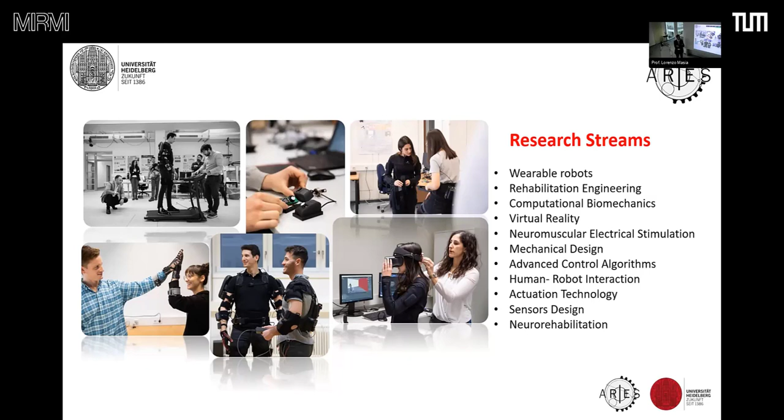I started with rehabilitation robotics. I started in 2005, joining the group of Neville Hogan and Igor Krebs, and this was me.

Then we met again in 2022. They were more or less the same, but I had changed a lot. They were always smiling a bit more rather than in 2005, more relaxed. In 2005, I would say they were super aggressive. I consider them my mentors for my career. They were the people who really helped me and gave me the boost to continue in research.

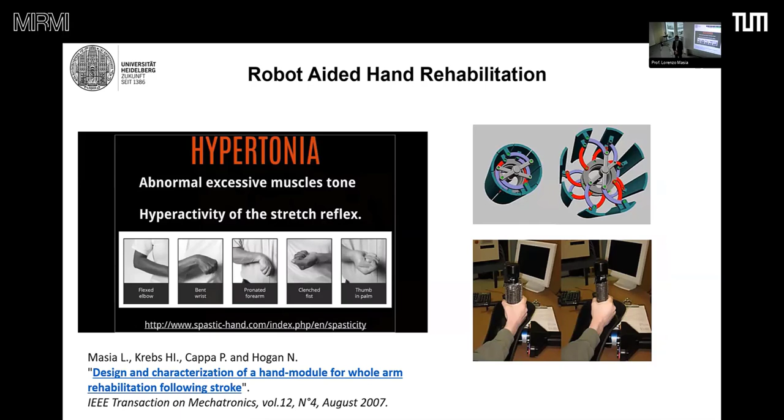Then we came up with an idea of using a very simple mechanism, a crank and sliding mechanism in multiple configurations, to simulate hand grasping. That was the main action we wanted to restore in people affected by stroke. This kind of system then became part of a company that at the time was named Interactive Motion Technology, and is a device quite widely used in the US for hand rehabilitation.

Once I came back to the Italian Institute of Technology, I wanted to design my own systems. This is my behavior - I want to design my own technology, and it's the same philosophy we use in our lab. I designed a system for wrist rehabilitation. It's a system that mobilizes all 3 degrees of freedom of the wrist. It works as a haptic system with a virtual reality environment.

I use it for several purposes, starting from general haptics, visual motor rotation, mastering of a virtual object with intrinsic elasticity that can be simulated by manual manipulation. Then I wanted to test myself on the ground of neurorehabilitation, using this kind of thing also in people affected by stroke, mostly adults, but also I have some experience in cerebral palsy, which is actually a stroke that happens in the very early stage of the developmental process in children.

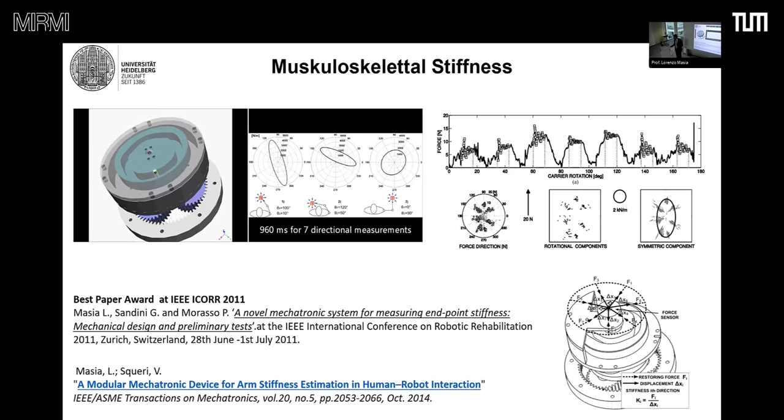What we do also in Heidelberg is studying bimanual manipulation using a bimanual exoskeleton. We have our own proprietary software for simulation of bimanual coupled interaction, and we use, of course, a commercially available exoskeleton, including also electrical stimulation.

I'm not going to talk about all these things. What I want to talk about is wearable technologies and exoskeletons. The first example of an exoskeleton dates back to 1967, when Ralph Mosher, an engineer at General Electric, wanted to design his own exoskeleton for industrial purposes.

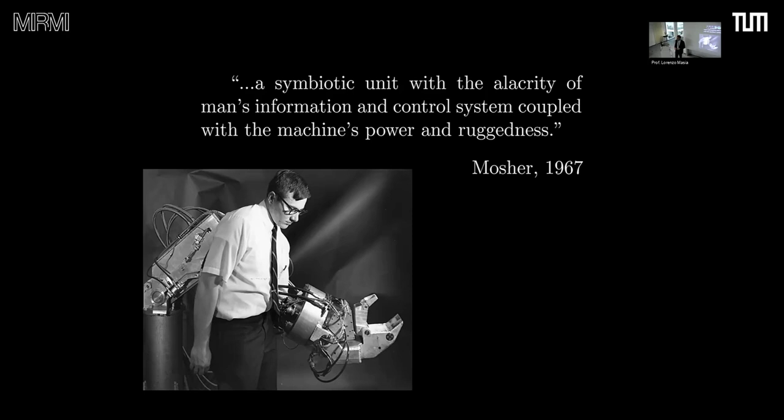That was quite a powerful system, but in terms of control, it was not at all symbiotic, even if it has been defined as a symbiotic unity. The problem is that at the time, control system design was mainly extracted from automation and didn't rely on human-machine interaction. That was a theorization and formalization of regular, classic control into interaction with men and robots.

Over the years, this approach shifted from a very rigid exoskeleton, highly powerful but with very low bandwidth of motion, to exoskeletons that are intrinsically softer, with higher bandwidth, but lower force. It's not that one represents the evolution of the other, because rigid exoskeletons are still widely used, especially for people affected by spinal cord injury, since they can sustain the weight of the person. However, if you want a very powerful system with low bandwidth of motion, you go for a rigid exoskeleton. If you want a system without a huge power-weight ratio but with very high bandwidth, you go for exosuits.

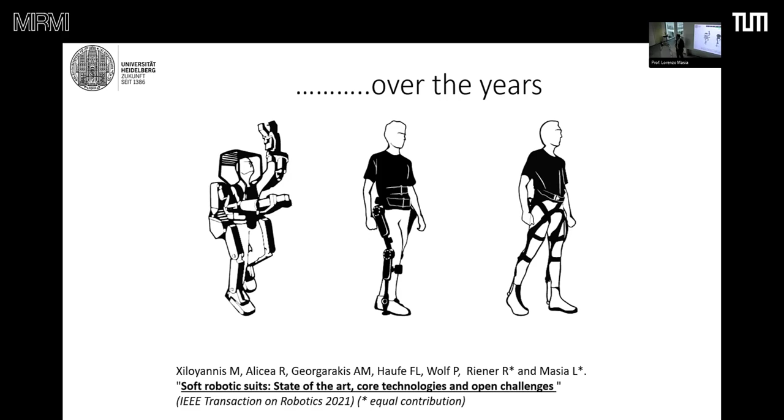Now, what is an exosuit? An exosuit is a wearable system that does not involve transmission of motion via rigid links and rigid hinges, but is composed of textile, and this textile includes both the actuation and the sensing. You rely on your biomechanics to transmit motion using physiological joints while actuating a different kind of system. In this example, you see a tendon-driven system used to mobilize the elbow.

There are several exosuits. The first examples were in the lower limb, with different kinds of actuation: tendon-driven, pneumatic, hydraulic actuation. Who were the pioneers? The Biodesign Lab of Conor Walsh at Harvard. They were the ones starting first.

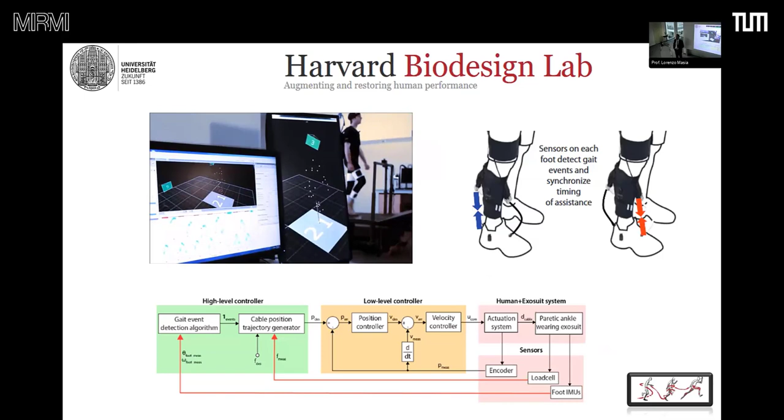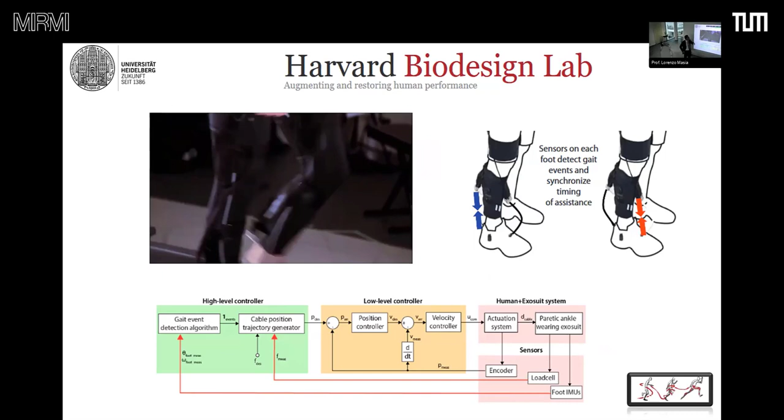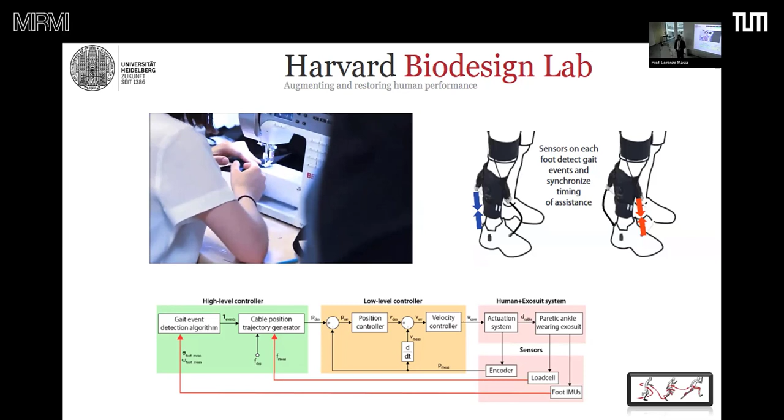How does an exosuit work? In this kind of application, you have to detect the walking phase, and then coordinate the electromechanical actuation that drives tendons in order to propel your walking phase. In this case, you are propelling the ankle joint. You extract everything from motion, and you can close the loop using force control. You can use a variety of controllers. There are also examples in the upper limb, using more or less the same technology.

However, upper limb or lower limb, they are quite different—not only in terms of the amount of force and assistance you have to provide, but also the typology of control you use to detect or classify the motion of the legs versus the motion of the arm, which is characterized by much higher dexterity compared to the legs.

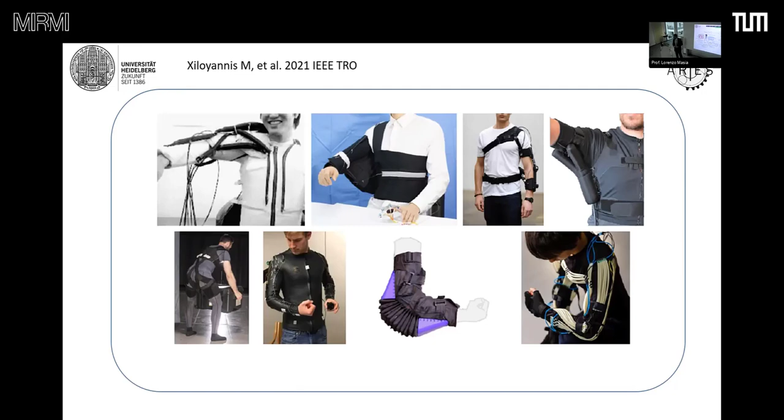If you want to design an exosuit, you have to deal with several pillars of research: how to distribute sensing, understanding control, designing the physical interface, choosing the actuation principle, and studying the ergonomics of the system. If we want to summarize this, we can go with three main pillars: ergonomics, actuation, and control.

I'm not an expert in ergonomics, and there are people here at TUM who are by far much better than me, because they are actually ruling the ergonomic field in Germany, and they are quite well known for classification and testing of exoskeletons and exosuits. But during the talk, I will talk mostly about our experience in control and actuation.

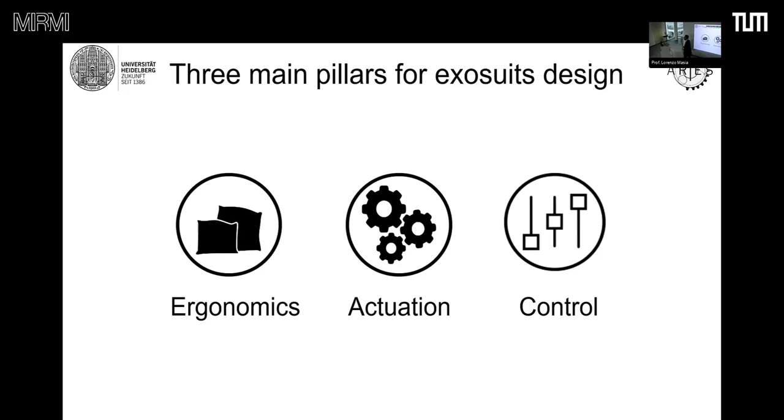Now, what can I say about actuation? We are usually inspired by the musculoskeletal system, which remains unmatched in terms of power-weight ratio and bandwidth. But what I mostly use is electromechanical actuators, which have electric motors and pulleys that pull cables—what I would call a tendon-driven actuation. We can also use other actuators: pneumatic muscles, twisted string actuators, shape memory alloys, or pneumatic artificial actuators. I am very much into electromechanical actuators also because you can use all the theory and control system design that derives from classic automation.

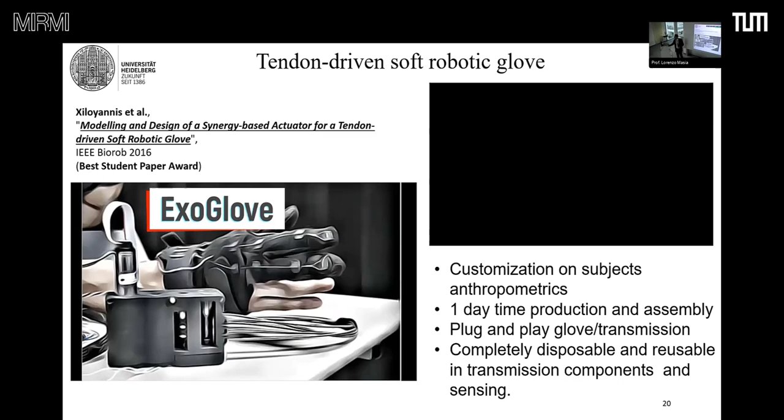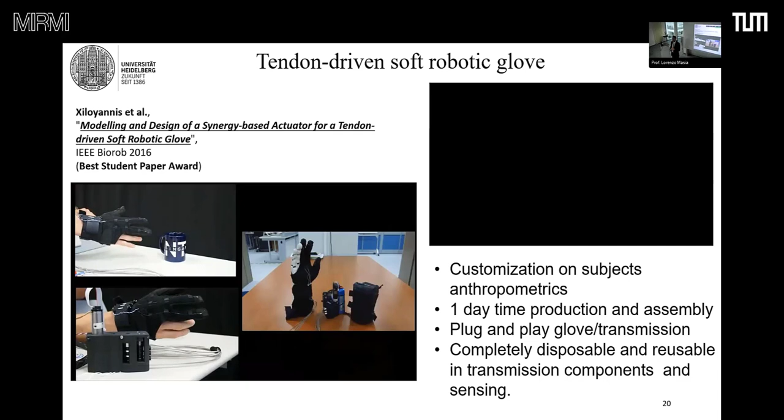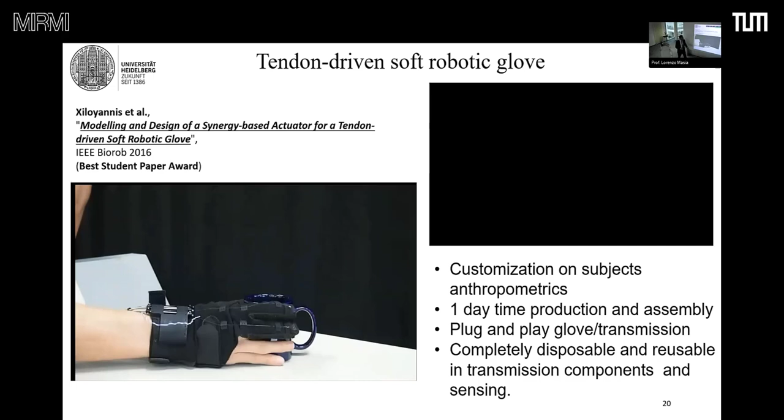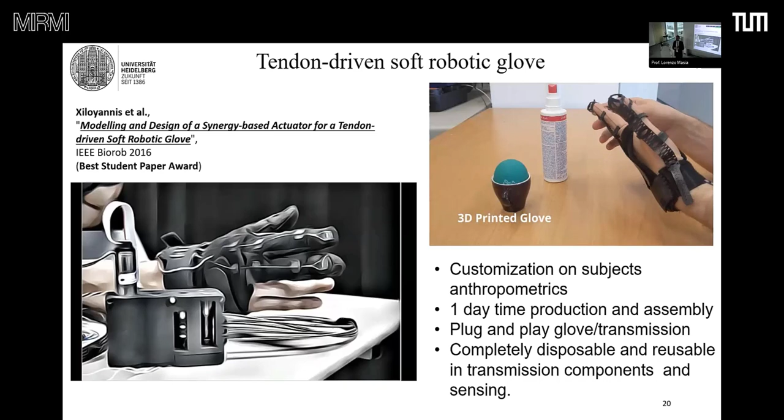Now, how can you drive an exosuit? This is a glove exosuit. You see here the actuation. Inside this glove, there are small sensors that detect the amount of motion of your fingers. You send this information about the motion of the person to the actuation, and the cables are routed around the finger. There's always a problem related to how you route the cable around the finger so as not to transmit parasitic torques.

What we do is also use 3D printing, additive manufacturing, and we have a parametric program just to measure some parts of the hands, sending everything into a program that starts a 3D printing system.

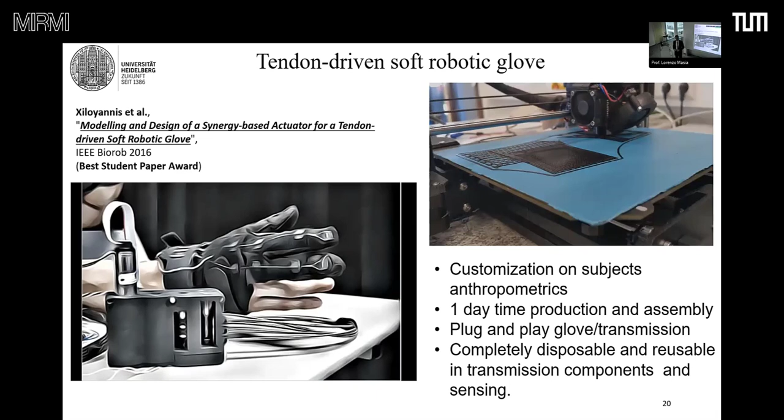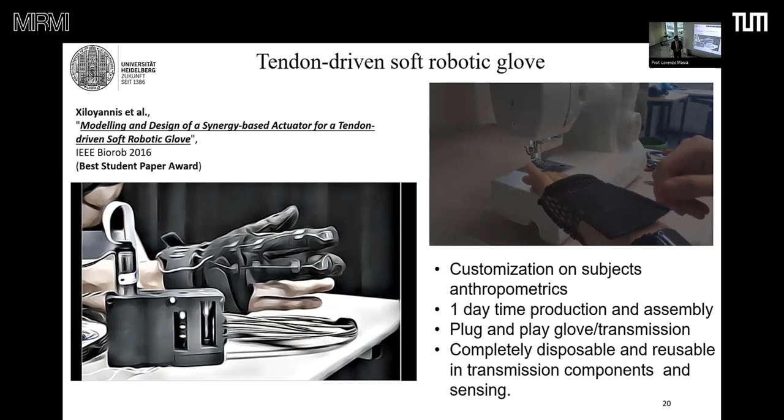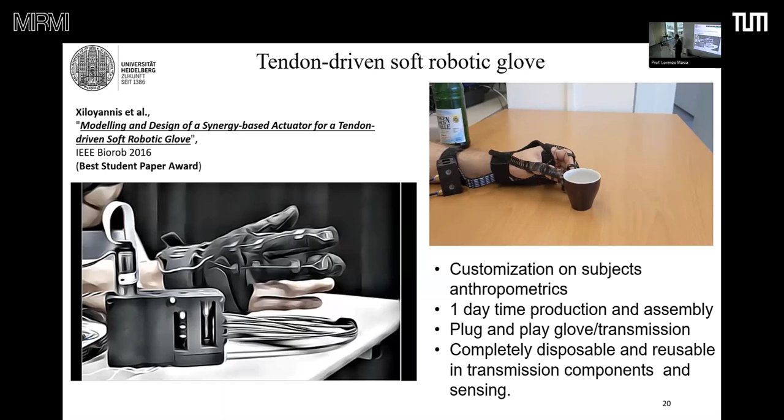We need just a few hours. We go to the hospital, measure the hand of the patient, come back, and start sewing a bit, printing every single component. After you've printed the single components, you can basically assemble in one day this device attached to the actuation, having something completely tailored to the anthropometry of the person. You get a better distribution of force, a better transmission of force, and better overall fitting of the system. From this approach, one of my students, Ryan, created a startup called Power Orthotics.

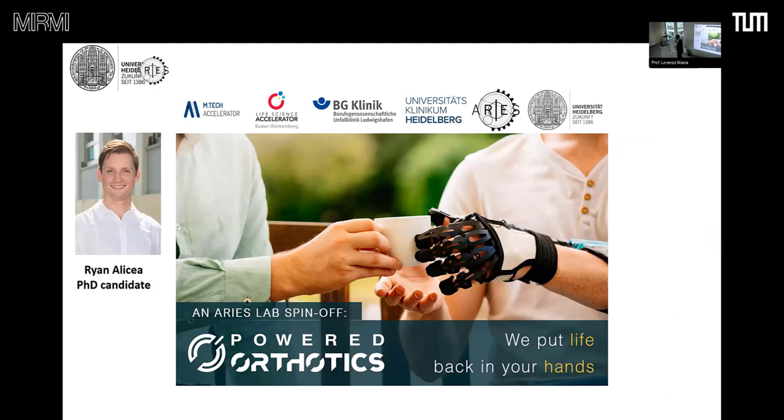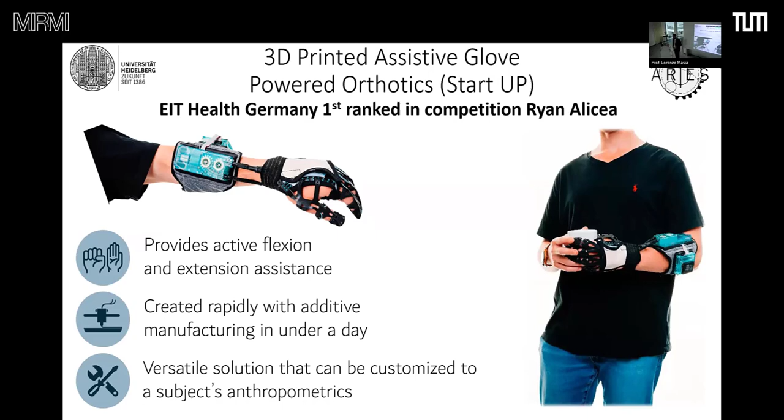This device is based essentially on the same technology. We have a system that is completely 3D printed with an actuation that is extremely compact and embedded, and it works on a very simple working principle. For example, there's a pressure-sensitive band on the unimpaired hand, and you can command the system via voice control, open or close, or use an app on the phone.

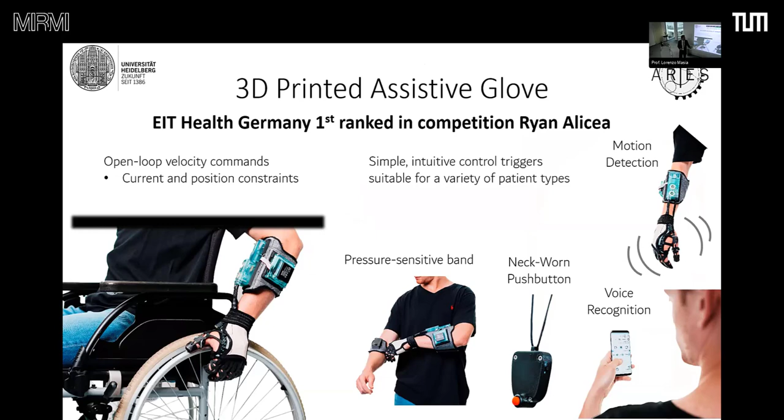We tested the system quite extensively with the Spinal Cord Injury Center at Heidelberg University, where we have a collaboration. Here you see a subject affected by spinal cord injury—not completely spinalized, but unable to fire the muscles enough to close the hand. With this device, you can provide additional force and torque in the grasping phase, allowing the person to grasp simple objects, or start a compensatory strategy for activities of daily living.

Now let's go into a more technical description of how we control these systems. If you want to control upper limb or lower limb, these are two separate, completely different domains. They're also separate in terms of what signal you have to acquire, and what kind of force you have to deliver.

If we start with upper limb, you need to understand what the signal is. Here it's indicated as the force reference that you want to send inside the low-level control, which actuates the electromechanical actuators. For upper limb, usually this kind of approach is an admittance control: you detect the force at the interaction with the exosuit, send it inside your controller, and generate a velocity in order to command the actuators.

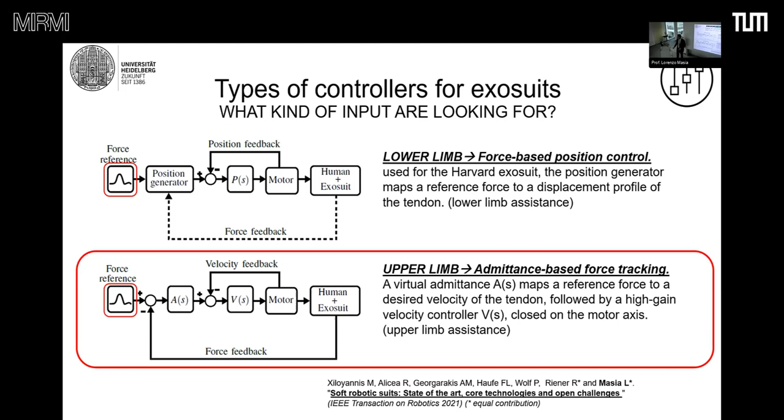For control of the upper limb, the first approach you can have is using what's called a dynamic arm model, or a force-gravity controller. How does it work? I have inertial measurement units, so I'm not detecting any biosignal, only motion signal. The three-dimensional configuration of the arm is communicated to the controller instantaneously. The controller has an embedded mechanical or biomechanical model tailored to the anthropometry of the person wearing the exosuit.

Then you compensate for gravity in a very simple way. The force sensors detect the force on the back. Two inertial measurement units communicate to the controller, which is positioned on the back of the person where the actuation is, sending the three-dimensional configuration. As soon as you move, the system compensates for gravity and provides you assistance.

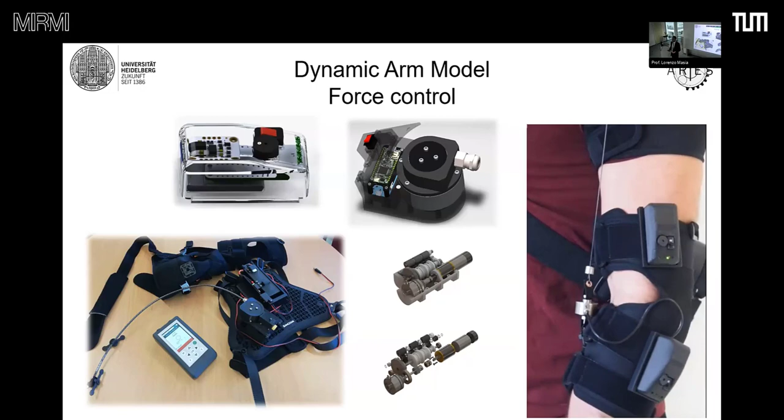Now, what's the problem with this kind of controller? If we take three different motions at three different velocities, the problem is that when you accelerate, when you move your arm with higher velocity, you always have a delay between the desired trajectory you want to execute and the assistance of the exosuit. This delay increases the faster you move, and of course, the accuracy of motion is jeopardized.

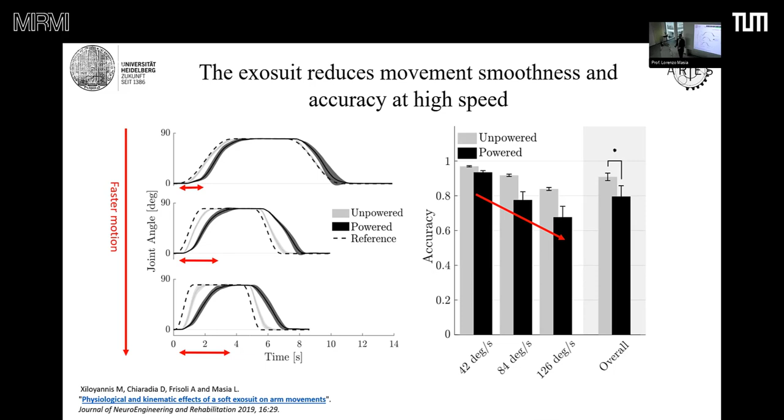Now, the question is, how do you solve this kind of problem? You have to detect the motion before it initiates, but to do that, you need to extract some kind of biosignal. The first biosignal that comes to mind, of course, is electromyography.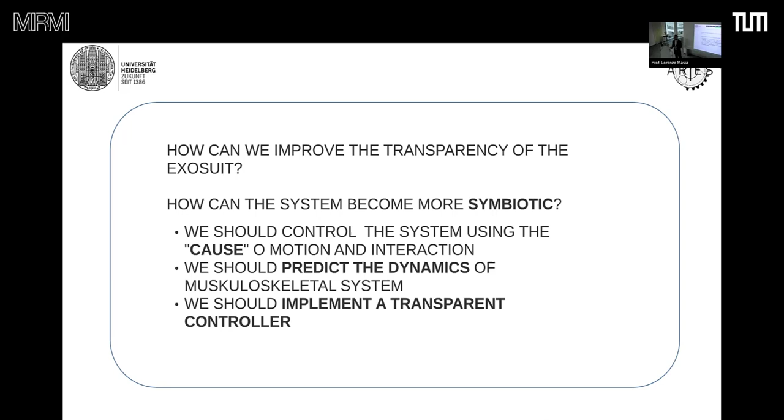You know that there's a delay between our ion channels opening and the generation of motion, called physiological electromechanical delay. It's a sort of bandwidth, an intrinsic delay in our muscles, between 60 milliseconds and 150 milliseconds, depending on whether you are moving large or small muscles.

So the idea is, can we include electromyography in the loop, and how can this electromyography be used to drive an exosuit? The idea came when I was with my friend and colleague Massimo Sartori at the University of Twente. He's extremely skilled in computational biomechanics, and we use what is called a myoprocessing technique.

A myoprocessing technique is not simply EMG control. It's usually a proportional control where you extract the EMG and send a signal. No — a myoprocessing control utilizes different blocks that rely on two signals: inertial measurement units that provide the motion of the arm, and electromyography.

These three different blocks work like this: an activation dynamic, a function that tells you, based on the input EMG, how much your muscle is contracting; the joint angle given by the inertial measurement unit, which tells you the velocity and kinematics of the muscle, for example the biceps. These two signals go inside the muscle tendon unit dynamics, which extracts the force of my biceps.

Now, what do you do with this force? You send it inside a computational model of your upper limb that is exactly tailored to your anthropometrics. This way, you succeed in generating a torque that is sent to the motor, and the motor compensates with a certain accuracy for your weight. The myoprocessing technique uses this different approach rather than a proportional myoelectric control.

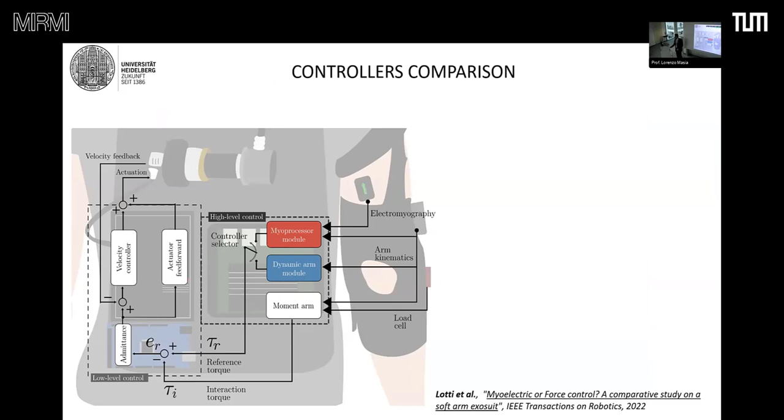So let's make this experiment: implement inside the embedded controller both the myoelectric and the force control, then test people without telling them which of these two controllers they are using. You can do it in three different ways — testing the accuracy of the controller in fine motions, testing the bandwidth (how fast you can go), and testing the stability, which is paramount in this kind of application.

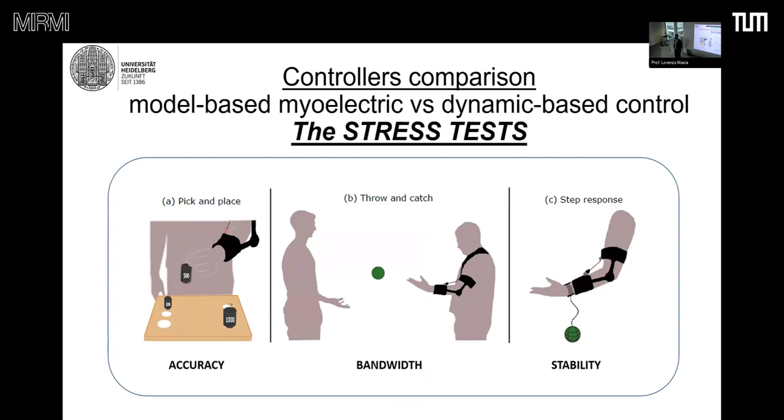If we test the stability, for example, we have something like this: a myoprocessor-controlled or dynamic arm. The person is blindfolded, and there's a 1.2 kilo weight that is falling down. Then you study two main parameters — this is simple control engineering.

Rise time, so the response time of the controllers and the actuators, and settling time — which of the two controllers stabilizes first. Well, I can tell you that between the two, the one with electromyography detects the impact of the ball first and reacts first.

So it reacts faster with respect to the force control. We are talking about more or less 300 milliseconds versus 400 milliseconds. These were tested on 12 subjects.

But in terms of stabilization, the force control stabilizes first — it's more stable, with a shorter settling time. The reason, I'm speculating, is noise in the electromyographic signal. However, what I can summarize from this slide is that neither of the two wins outright, one-to-one.

If we consider the capacity of actuation between the two controllers — as soon as I attempt to move, which one reacts much faster? Well, of course, it's the myoprocessing system.

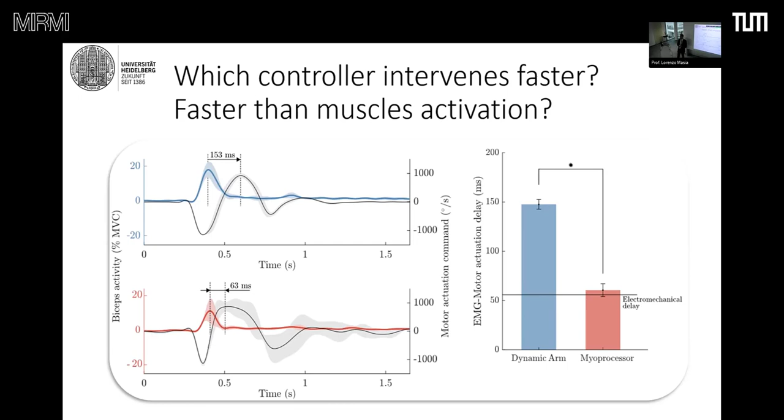Where the myoprocessing technique wins without hesitation: if you move different weights, starting from 200 grams, 500 grams, and 1,000 grams, and look at the amount of torque generated by the electromechanical actuators in pure force control, you see it doesn't change depending on the external weight being lifted. So it does not adapt to the external load.

You would actually have to enter the program and increase the proportional gain in the low-level PID controller. But with myoprocessing control, without changing any gain, if I grab a heavier object, the assistance of the system will be higher. There's an automatic adaptation that depends on the initial part of the electromyographic signal that is detected, up to a level where you saturate the electromechanical actuator.

How can you do this if you don't want to use electromyography? Because this is always a problem - electromyography is a signal that changes over the course of time depending on skin impedance, for example if you wear the electromyography sensors under the exosuit and it moves.

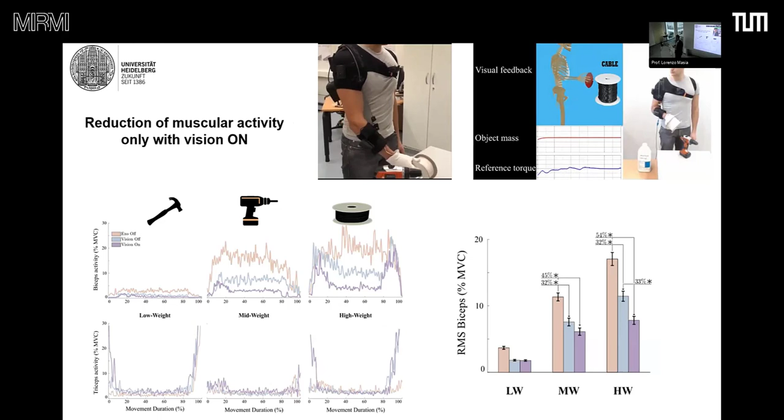So in this way, the person has a camera on the chest, and as soon as you look at an object and stabilize, it is recognized. When you grasp it, the system understands you're grasping the object and recalculates the gravity of your arm plus that of the object. Of course, you need to train the system with a database of different objects - if it's an object not in the database, it doesn't know what kind of assistance to provide.

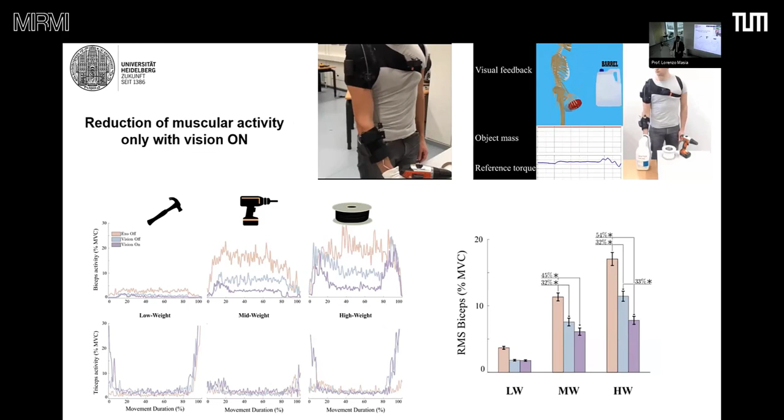What are the clinical applications for this kind of technology? Well, we tested our system operating solely in force control with people affected by spinal cord injury. This was an experiment performed in Italy on a C5 patient who was highly impaired, but still had a residual capacity of motion.

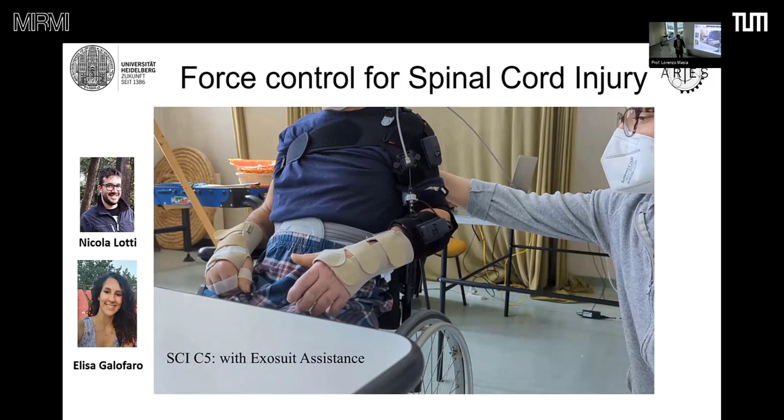The person, when the exosuit is not active, does not succeed in moving. But as soon as you activate it - and of course you have to trim the sensitivity of the controller in a certain way - he's able to amplify his motion, using that residual capacity of motion to move the arm. Of course, this is not a functional motion.

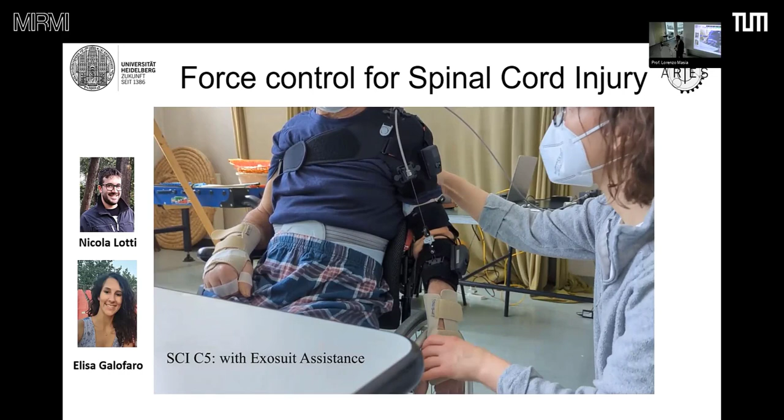However, he can exercise with this kind of approach. We wanted to test this technology on multiple sclerosis patients. We have a collaboration with the Italian Association of Multiple Sclerosis, and we want to provide this technology for enhancing endurance. The problem with multiple sclerosis patients is that when they start a rehabilitation program, they don't have enough endurance, so they stop exercising. If you provide this kind of technology, they're able to exercise for a bit more time.

What we do is provide this exosuit and ask the person to lift objects in a repetitive motion. What we find is that using the exosuit, compared to without it, they reach a better range of motion and smoother movements, yet no change in the physiological motion they had before.

If you look at high-density EMG on the biceps and triceps, you'll see there's lower muscle activity with the exosuit, and they endure much longer in terms of time holding an object before encountering muscular fatigue, before they start trembling.

So all of this approach tells you that using this kind of technology may allow people affected by neurological disease to have higher endurance during rehabilitation programs.

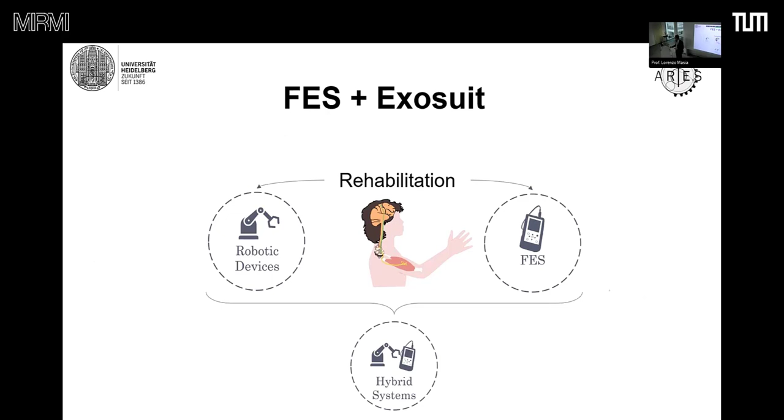Another thing we also do with the soft wearable exosuit is merging functional electrical stimulation with this approach. What is functional electrical stimulation? It's a common therapeutic approach in which current is injected into your muscles to provide contraction and avoid muscular atrophy. This works pretty well, but there are two problems: first, injecting current into the muscles is not very pleasant; and second, this way of injecting current causes recruitment of large muscle fibers.

The motion that is provided by the person is very abrupt. Plus, since you are recruiting large muscle fibers, you have much consumption of oxygen, and you encounter onset of muscular fatigue much earlier, so you have to switch the system off.

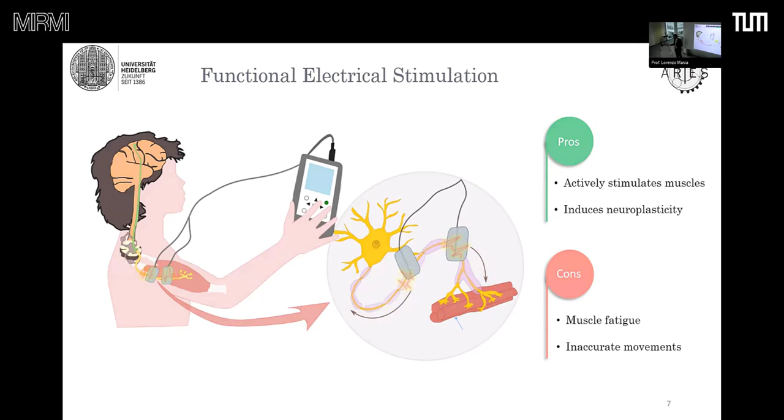We are able to detect the motion, and at the moment we detect the motion, we split the assistance between functional electric stimulation and assistance from the exosuit. You can use the functional electric stimulators themselves to measure residual EMG.

The person attempts to move, but has an EMG that is very small. Of course this is not a patient, it's a completely unimpaired person, a student. When we measure the EMG, this amount of residual EMG sent inside the controller splits between the current

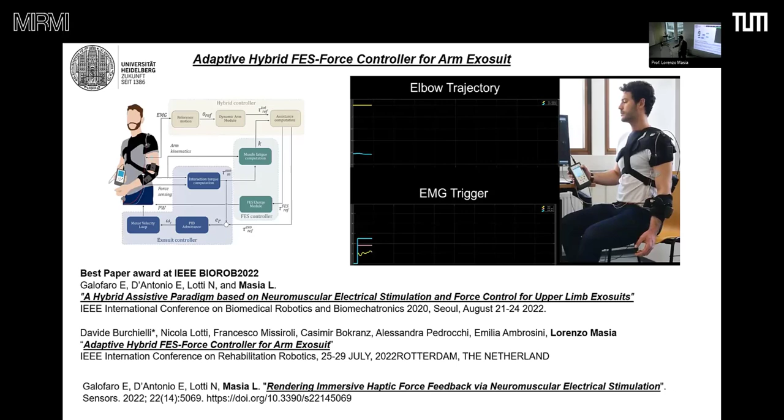that is decreased on the functional electric stimulators and the amount of torque that allows lifting the arm. In this way, we are still able to assist people, but we are also able to inject current in the muscle, avoiding muscular atrophy. The results are more or less similar to the one with functional electric stimulator.

Let me try again. This is with functional electric stimulator, and it contracts very abruptly. And this is with functional electric stimulator plus exosuit.

What we obtain is that if we ask a person to make repetitions before encountering muscular fatigue, the people using the hybrid controller, with functional electric stimulator plus electromechanical assistance, are able to exercise much longer compared to people not using the exosuit.

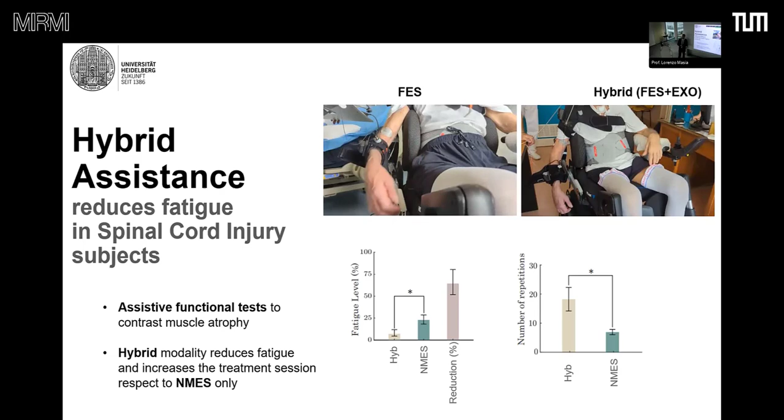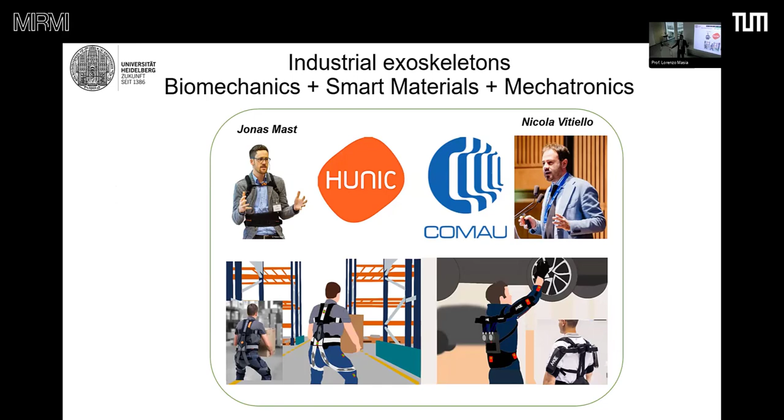We do also human augmentation in industry. We have a collaboration with Comau and HUNIC. This is a German company. I will now present what we do with Comau.

What we have done is integrate a commercially available exoskeleton, a passive exoskeleton for overhead working, with a layer that is soft and actuated. In this way, you have a hybrid system, with active and passive, rigid and soft architecture.

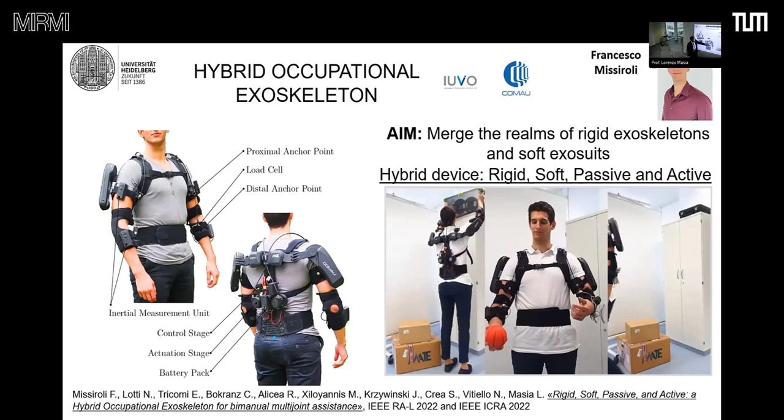So you see, this is the elbow exosuit. Now you can use this kind of thing, of course, for lifting. And then you have to test if the system is effective.

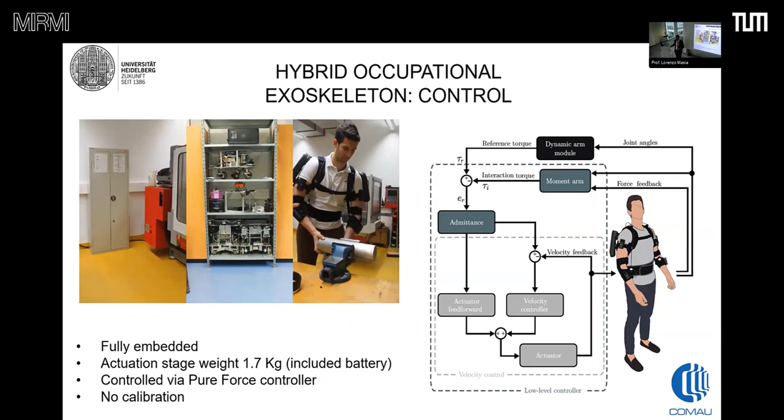How do you test it? Well, someone from the mechanical engineering department will tell me to use the exoskeleton assessment test, which was actually designed here by Professor Bengler, but we didn't have the metabolic analyzer at the time. So you need a metabolic consumption analyzer.

Something you can say is there are papers that demonstrated that using this kind of exoskeleton increases co-contraction of the muscles. This means that when you use this kind of system, you correct your trajectory several times. It's an expenditure of energy, a disruption of the physiological motion.

I think it depends also on the adaptation to the system. After a while, probably you master the assistance of the system and know how much you have to fire muscles. However, we measured the co-contraction index using this approach with and without the exosuit, and we noticed that after a while, there's no co-contraction between different agonist and antagonist muscles once you exercise and train yourself.

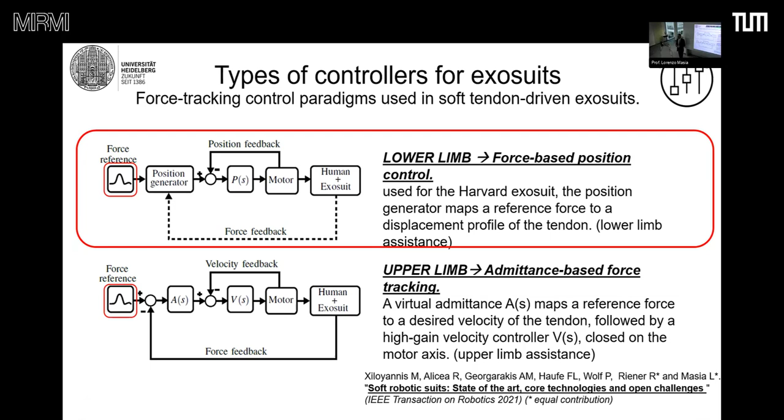Now let's start understanding. Let's cancel upper limb, let's go to lower limb, because lower limb is completely different. In lower limb, you always use a sort of force control, even if in our approach we don't use force sensors. But the important thing is how do you understand what is happening at the walking leg? You have to understand and detect the gait phase.

Who were the pioneers? Of course, the Biodesign Lab, Conor Walsh. They published several papers and demonstrated that on treadmills, in lab, they achieved 15.4% or 7.1% reduction of metabolic consumption, oxygen consumption, for walking and running respectively. It's the cost of transport, usually.

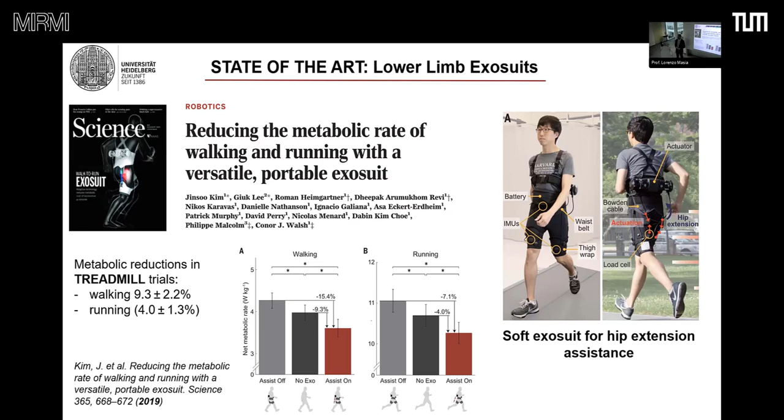There's a group of Robert Riener from ETH that uses a proprietary technology from a spin-off called MyoSwiss.

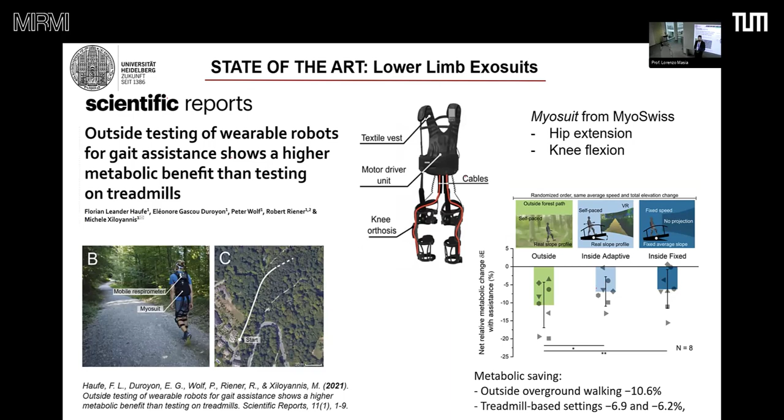This is an exoskeleton. Outdoors, they have roughly 10% reduction in metabolic consumption. The group of Steve Collins from Stanford has a rigid exoskeleton using machine learning to optimize the assistance, tailoring the system to the gait of the person wearing the exosuit, achieving 17% reduction in cost of transport outdoor. They were walking around this building.

Now, we do have our own technology that consists of several architectures. The first architecture we designed was an under-actuated system with a single motor that pulls and releases the legs, depending on which leg is stepping forward. It's a hip exosuit that assists in flexion.

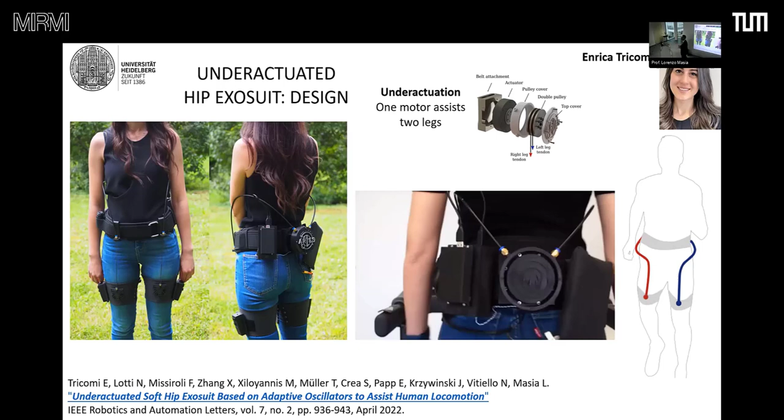The system works with Bluetooth low energy, inertial measurement units that communicate the gait phase detection to the controller on the belt. As you can see, we don't use any force sensors, yet the cables are always in tension, they never slack, without using force sensors.

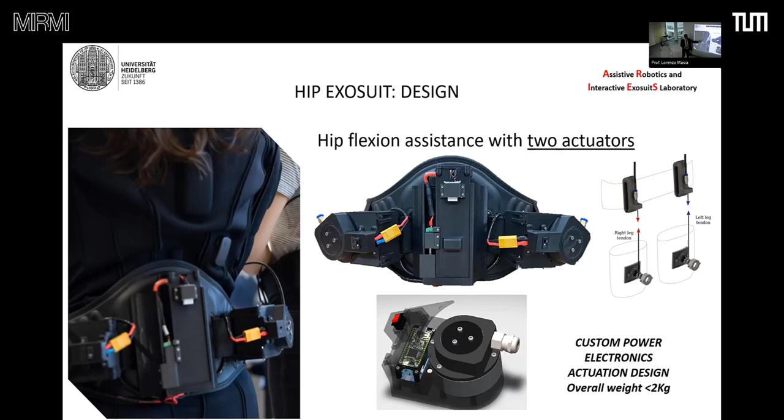We also have another system that is much more powerful. It consists of two motors, one for each leg. How do we control this kind of system? We have our own controllers that work using gait phase reconstruction, so velocity and position extracted by the inertial measurement units, with some Kalman filtering to polish the signal.

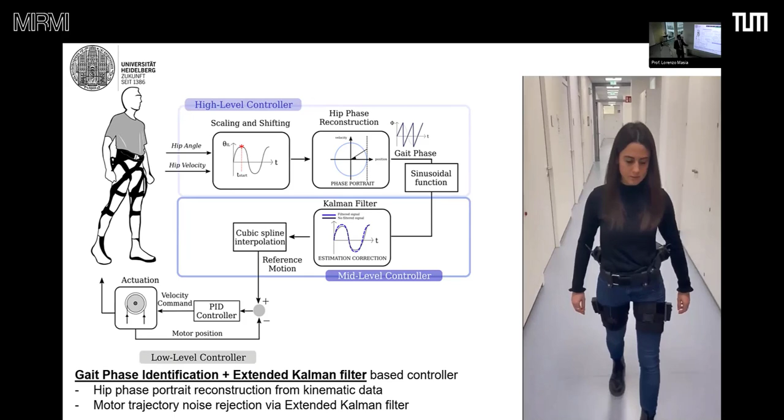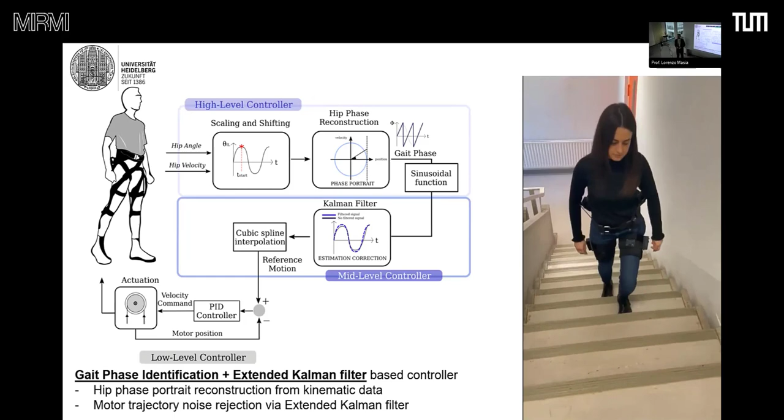The system is extremely stable. The cables are always in tension. You can walk over stairs, go down stairs, and now I will show you some examples.

We want to test this controller independently on the hardware architecture: two motors and an under-actuated system. Does the same controller work? We tested outdoor, in Heidelberg on the Philosophenweg.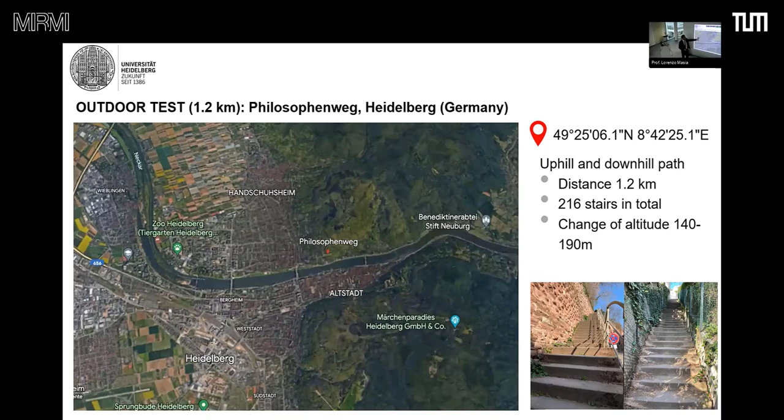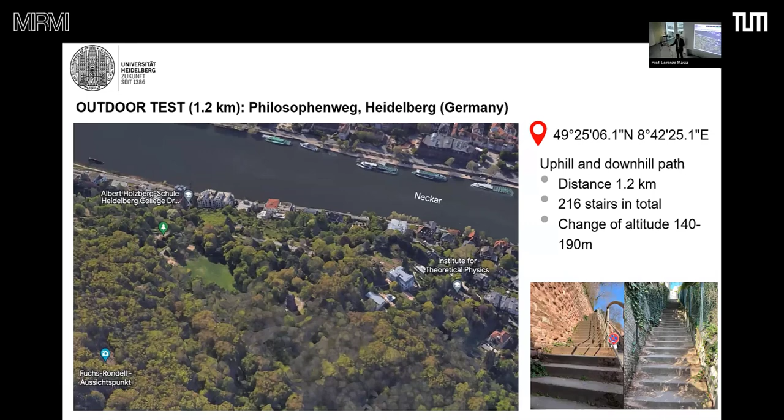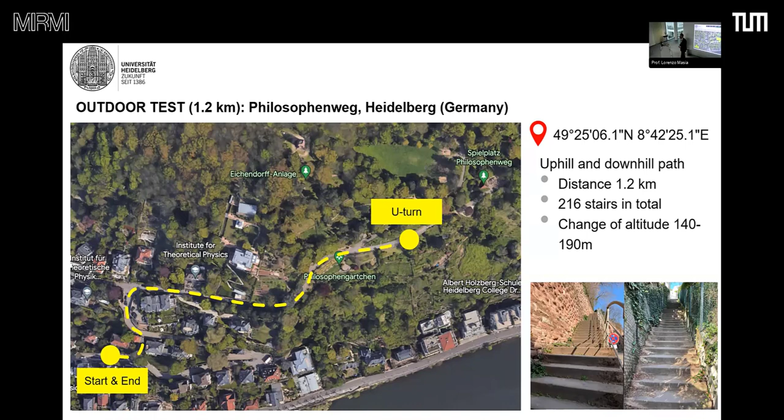That is a very nice walking pattern in front of Heidelberg castle. We tested the system for a walk of 1.2 kilometers on unimpaired people, of course. It's quite a big walk because the distance is 1.2 kilometers, but you have 216 stairs and 50 meters of ascension or descending, depending if you go up or down.

What we obtained with this, let me see if you can hear the actuation. We have 20% reduction in cost of transport consumption for the fully-actuated system, 11% for the single system with one motor. This is what we obtain.

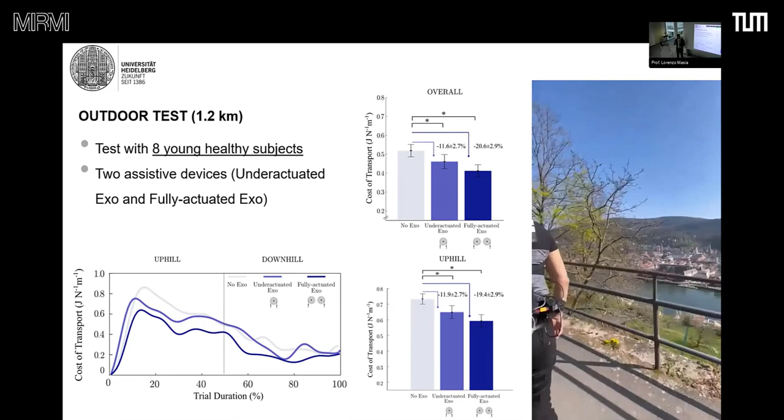Now, we tested also on an elderly population. I have to say that the German grandparents actually walk quite fast. This one is 73 years old, and my student is struggling to keep up with her while collecting the data.

So here we didn't do it on 1.2 kilometers, but we did it with the Institute of Sport Science in Heidelberg on a 400 meter path in the track and field. What we obtain, well, also here there's a significant decrease. This guy, 14%, 12%, it changed, yet it's significant.

Now, how can we use artificial intelligence with this kind of approach, or machine learning? Why can it be useful in this kind of science? Well, the main idea of using an exosuit is synchronizing the walking pattern.

But if you do it in the lab on a treadmill, it's quite easy, unless the treadmill explodes, nothing happens. If you walk outside, there are changes, U-turns, speed changes, ramps. So you need to predict and put the system in phase, predicting or classifying what is happening, in order to account for sudden changes in the walking pattern.

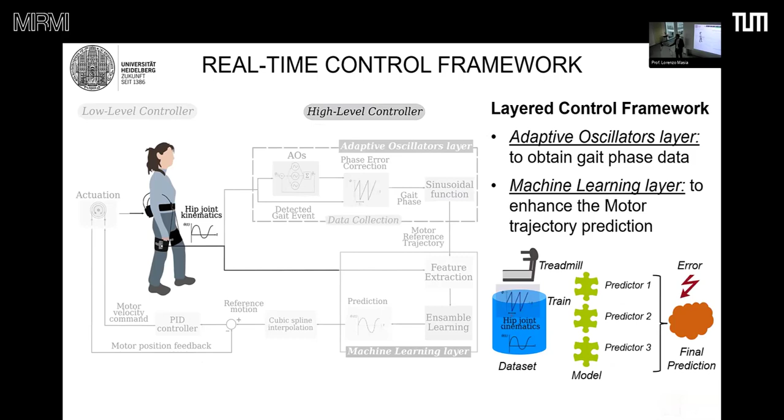You create a data set, put everything into this data set, give it to the machine learning layer, and then at the end you test your exosuit. What you obtain is a system where the cable never slacks, preserving continuous assistance in different conditions without ever slacking. Well, of course, if you run, it can start to slack.

But it works decently. Now, the question is, how do you test if it works or not? I can tell you that the cable not slacking works, but then you will ask me, I would like to have something numerically speaking. Yeah, you're right.

So you can test metabolic consumption on the treadmill at velocity 0.6, 0.8, 1.1, without the exosuit, with the exosuit without the machine learning layer, and with the exosuit with the machine learning layer. You see that with and without the machine learning layer, there are no significant differences in the use of the exosuit on the treadmill. But as soon as you step outside, the difference between using the machine learning layer or not becomes significant.

And it goes down over 10% in the trial that we have done outdoor. So it's not that the system doesn't work without the machine learning layer, but you can trim it better. You can provide a boost in terms of the system's capacity to provide assistance, even in conditions that the normal controller does not detect—it's an additional layer.

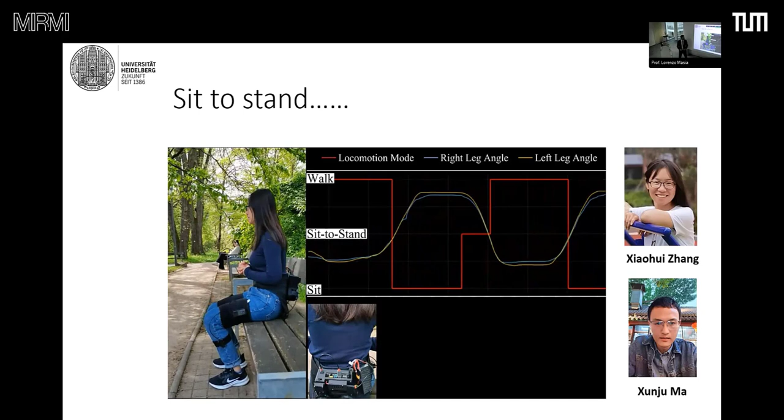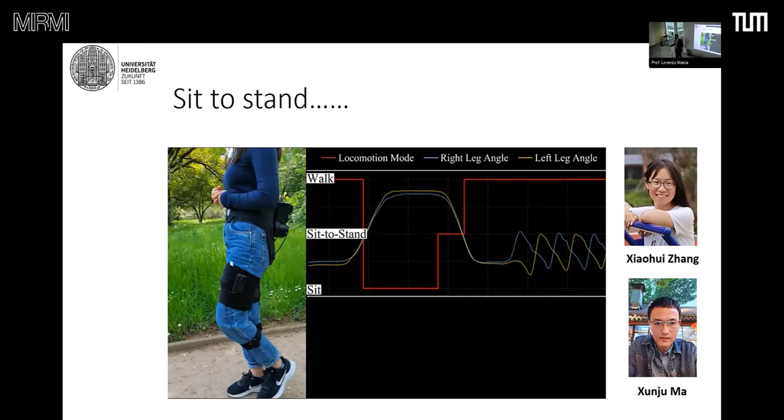Now, what about stairs and level ground? There's another application. Stairs and level ground can be detected using a machine learning approach, this time not using two inertial measurement units, but three. You train the system, you take three inertial measurement units and have students climb stairs repeatedly, then extract the data, feed it to the program, and start walking.

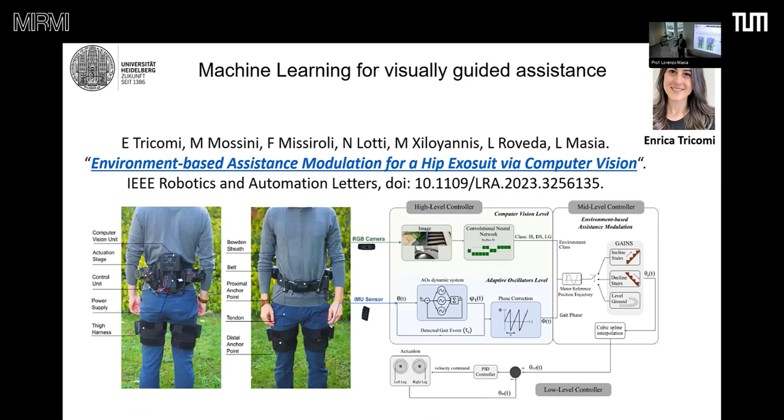You have a classification accuracy that is slightly lower, however quite good — we go more or less over 90%. And here you are working on level ground, here the actuation, you're going down, now you go up. The actuation pushes much more because it allows you to lift the legs in a better way. Also in this case, there's a significant reduction of metabolic consumption.

Can you run with this kind of exosuit? Not much. You need a specific system with high bandwidth, high force. The one that we have is able to reach, sorry, 20 kilograms, so 200 newtons, pulling a cable. It's actually here, the system.

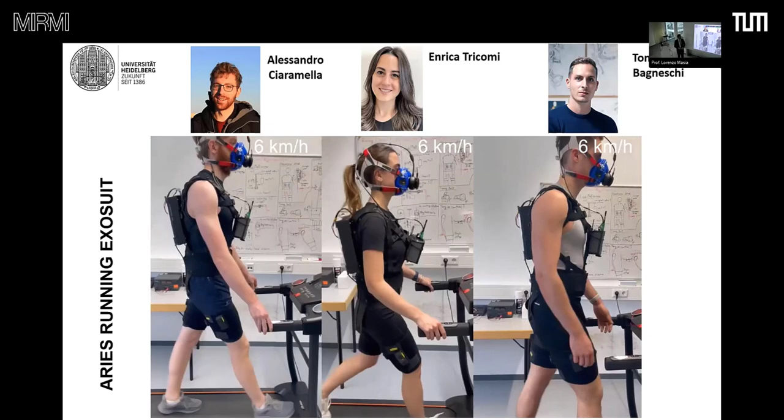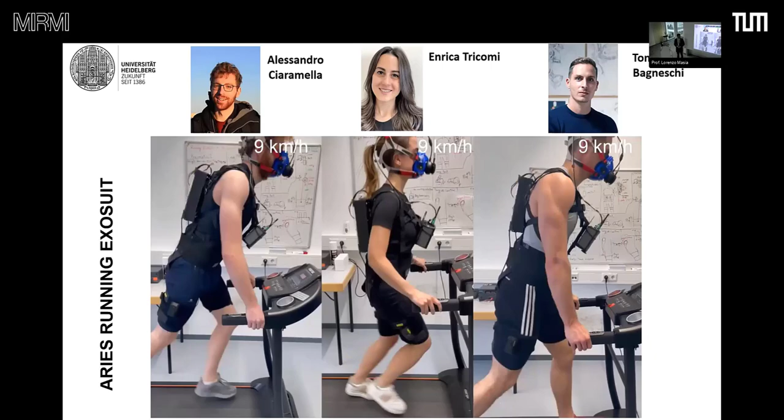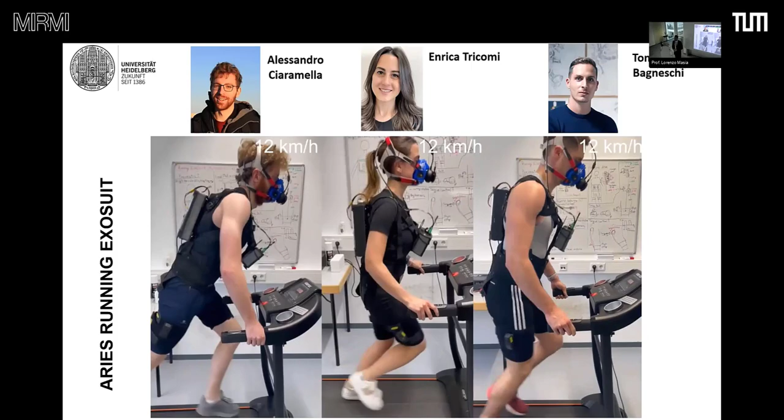It works with an actuation unit that you can wear, and has a twisted string system with a very small motor that rotates at very high speed and succeeds in inverting the motion at a very high speed. The result is the following: 6 kilometers per hour. It's very noisy. Then the treadmill, which isn't fantastic — I have to invest in a treadmill — it doesn't push. That's it.

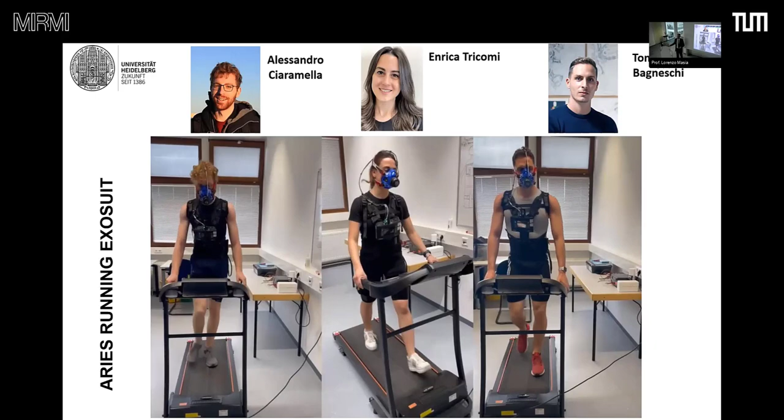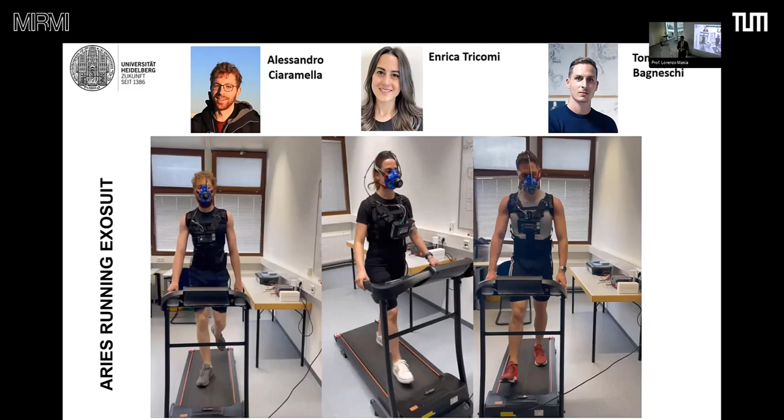All right, I think this was the last slide. We still don't have results for this because we actually activated the system a week ago, but we have the system that now we will show because my students brought this device. So the nasty questions go to them, not to me.

I would like to thank my team, which is fantastic. I have dedicated a lot of time to them, but I think that in this field, we are probably quite solid.